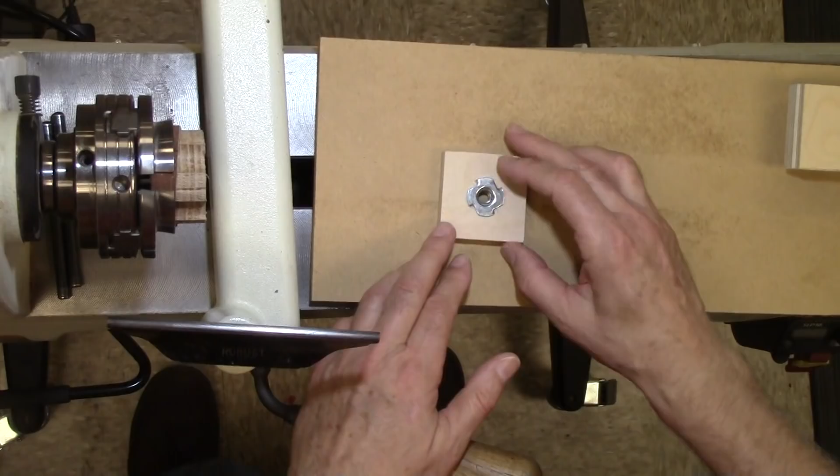And first thing I do is I take the body block and I'll drill a hole in the body block that gives me a snug fit of the shaft of the T-nut. So I want to have that hole that's that diameter, that'll just slip in there, not a tight fit. I want to be able to slip in, but I don't want it sloppy. If it's sloppy, if the wood around here is not supporting the body of that T-nut, any cocking movement like that is going to work this loose up here. With the cover block on, it's not so bad, but it's still going to get loose in there.

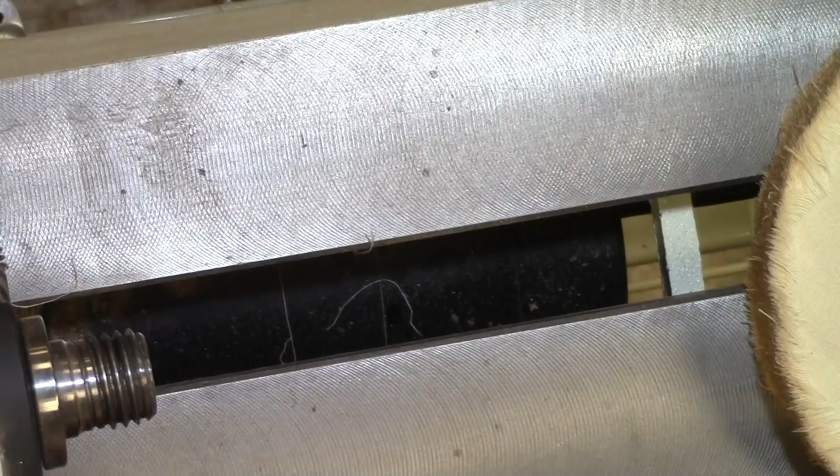So I want to drill this hole here as close as I can get to the diameter of the body of the T-nut. So to figure out what size I need, I've just drilled holes in a block that are close to what I'm thinking I'm going to be using. Then I can usually just take my T-nuts and see which hole it fits into.

And then once you get that hole drilled, let's see. Once you get that hole drilled, you stick your bolt through the hole and thread it into the T-nut. And then just put it in a vise, tighten it up, and just draw the T-nut down into the block of wood. I've seen some people hit it with a hammer and it doesn't actually go in straight.

Well, this way you've got the hole on the top here the same diameter as the bolt. So that helps force, well no, this one isn't. But it's the washer on here that is going to help pull that T-nut in straight and not get caught. So that's how I pull that in.

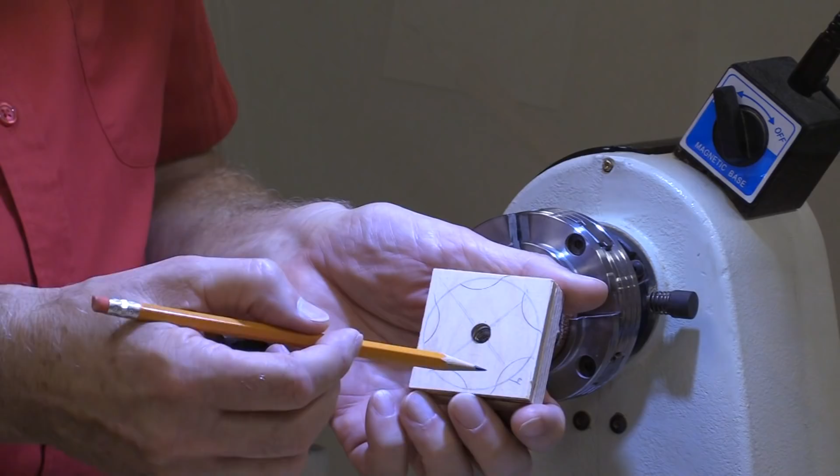So once I have it like that, now I can take it to the scroll saw, and what I do, I'm not an extremely proficient scroll saw user, so I tried cutting around and then going into the flutes and cutting around, going into the flutes, so I just wasn't very pleased with those intersections there. You see it better that way or see it better this way? The second way.

Okay. I was coming around here and then trying to cut in there and then come back out like that. I wasn't very pleased with the changes of direction there at my corners on my knob. So what I did is I just cut all the way around. It was easy to just follow the line without changing any directions. Then once I got around, then I could come in and just cut the flutes out on the scroll saw.

And you could leave it like that if you choose, but my diameter of my flute here is 1 inch. I got a spindle sander with a 1 inch spindle on it, and I'll show you using this a little bit later. After you do that, then I could take it to that spindle sander and just go around and clean up the flutes if I had a little bit of tear out from the scroll saw.

And then once I have that done, then I got my standoff block. Again, I got my hole in the center, mark it so when I go to scroll saw, I got something to follow. And then I bore the clearance hole in it. Then I take the scroll saw and I cut around that. Again, glue it on and use a bolt, put it in there and bolt, hold it, clamp it.

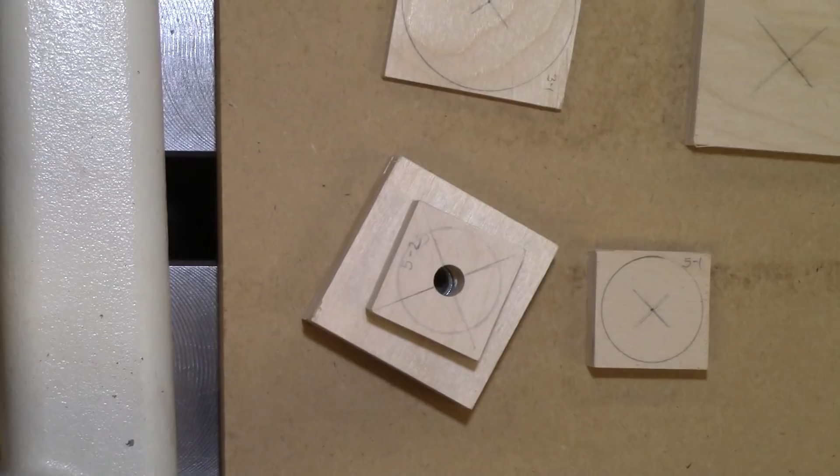And then for a scroll saw version, here's the finished scroll saw version. It's got an MDF and a Baltic birch. Okay, but I like to have things a little bit more contoured than that, so I'll show you the next steps of doing it on the lathe, finishing on.

So basically, I get to that same point, but instead of cutting the flutes, cutting the round on the scroll saw, I'll saw the square block like this, and I use a mandrel. Use a mandrel like that, and on the lathe. No, I'm sorry, I skipped a step there. I go ahead and glue the standoff block on. Everything is still square. I glue the standoff block on.

I'll screw it on this way first, and I'll clean up this surface here, make sure it's a reference surface there. And then once I get that rounded there, I can go ahead and take some of this material off here to get that down a little bit close to the final dimension. I could do the same thing up here, but I'd rather do it around this way.

Even with great pains, you try to get this whole board in this mandrel straight, and you swear everything is in there straight, and then when you turn it on, see, it doesn't run absolutely perfectly true. Now I could fiddle with that. I could drill that hole a little bit larger, and I could fiddle with it.

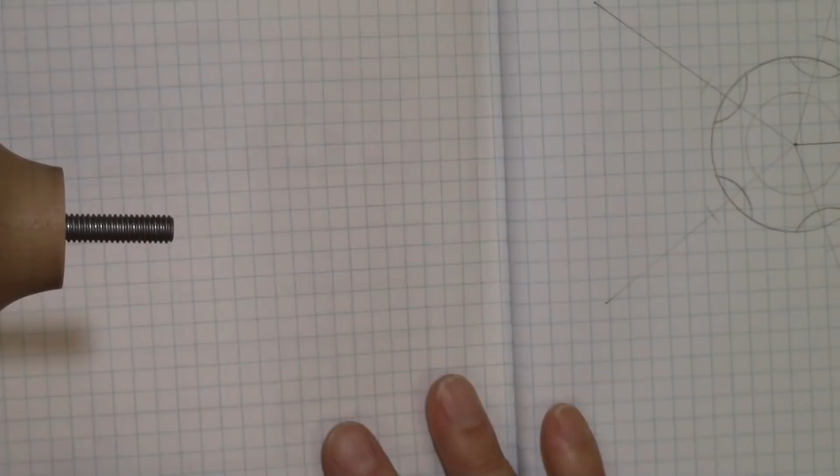I'm going to show you how you can draw your own pattern very easily. Larry wants to show off his pattern. I'll show Larry's pattern. Looks like Larry drew his. So it's very simple to draw that pattern. I can either describe this one, or I can actually draw it to show you.

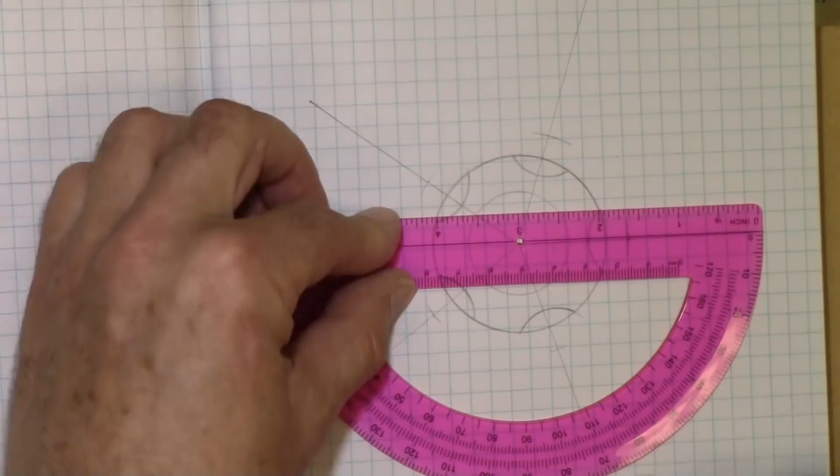I just selected a point, put my protractor on that point. Well, first I'll put a point and do a line out there. So I'll put a protractor on there. So I'm making a 5-sided figure here. 360 divided by 5 is 72. So I came up here and put a mark up here at 72, at 144. Flipped over this way, 72, 144, and then I drew my lines out to give me the points out there.

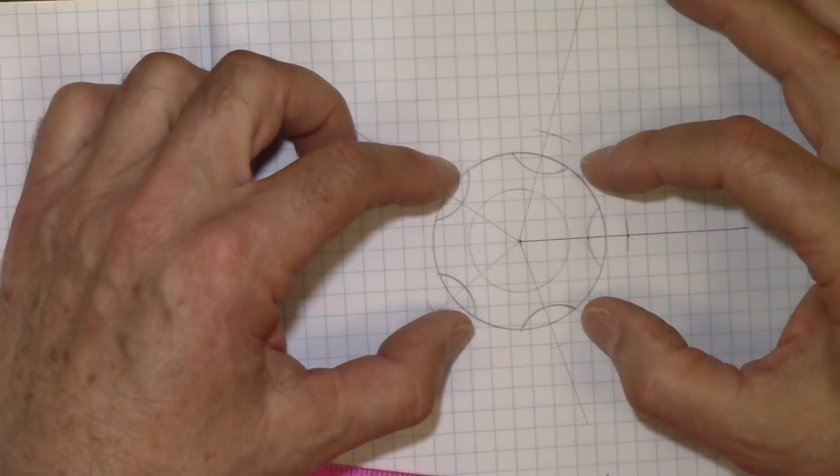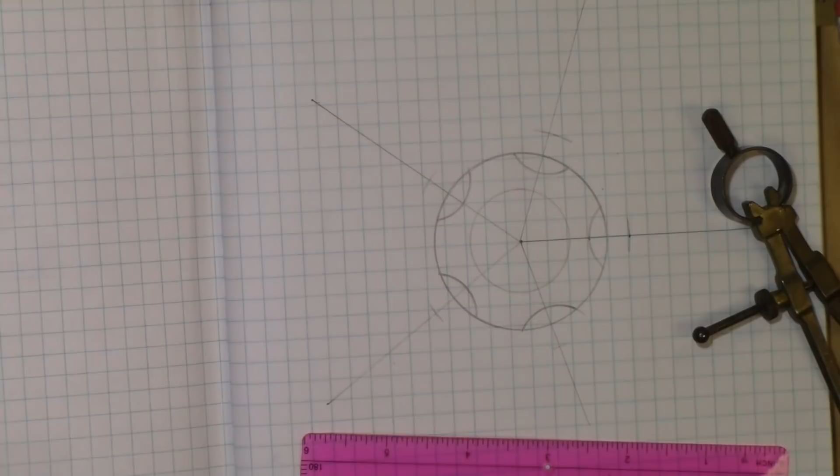Then I drew a circle for my 2 1/8 inch diameter circle. I drew a circle in here for my 1 1/16 standoff, and then I measured halfway between there and there, because I wanted my flutes to go in about half the distance from the outer diameter to there. That's the depth my flutes are going to be. So I measured in halfway, and then I wanted my flute diameter to be 1 inch.

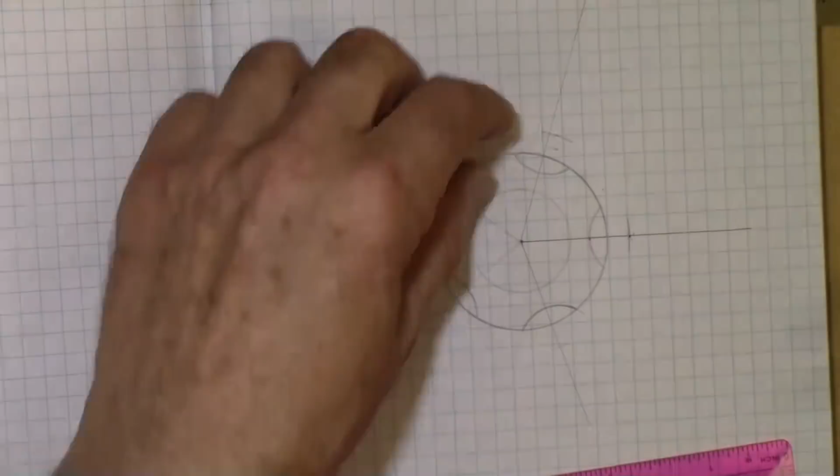So I came out here and made a mark at 1/2 inch. Then I reset my compass to that, from there out to there, and put marks on those lines at those points there. Then I set my compass back to 1/2 inch, and I just came in and drew the arc for each of the flutes like that, just going around it from that point there, and that's my pattern.

You cut that out and you glue it on. So if I want to make it a different size, well, you got to draw it over again. With DeltaCAD, I've got it on the computer. If I want another copy, just go print another copy out. You only have to draw it once.

So, I've got a question, Dan. Yeah. On the number of flutes on there, is there a big significance? Whatever you feel. Like I said, I like that knob. I patterned mine after that knob. Well, the biggest reason is you only have 5 fingers, some of us. Well, I'm only putting 4. You put one on each one of the flutes in there. Yeah, that works. You have 5 fingers, 5 flutes. There you go. But you can make them square or triangular or whatever.

No particular reason. I've got a knob at home that's probably got 8 flutes around, just real shallow flutes. All right. Just what your feel is. I like the feel of this knob, so that's why I did it with 5 flutes. And that's why the depth of that. I figured that was about the depth of what it was. I just liked the way that knob felt.

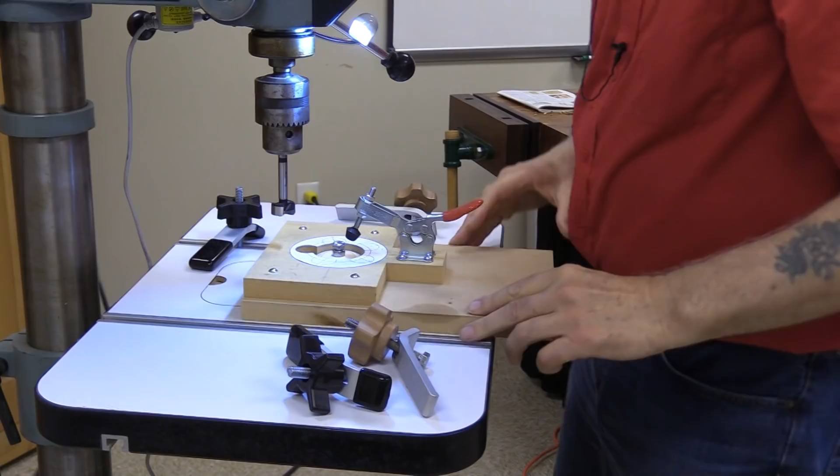Okay, jig. So that was the jig that I came up with to compete with Larry. So the first thing I do, I want to line my block up with that bit, so the bit goes up in and out of there without catching on the edges. So what you can do is release. Now you just bring this around like this.

And that'll hold it in place. And then... pieces back again to make sure it's going in without catching on the edges of that. And then tighten these down.

Those look like store-bought knobs. Well, I've got enough material there to make some more of these. I haven't got around to making them yet. I'm busy getting all my props done, and I haven't had a chance to complete them. So those will be replaced. You can have these, Rob. Okay, good.

I already got drawers going. And this is an afterthought. I was originally doing it with just 2 clamps, and it was moving on me a little bit. So I just got these last week, and I hadn't had a chance to make knobs for those yet. So that's going to hold it nice and secure.

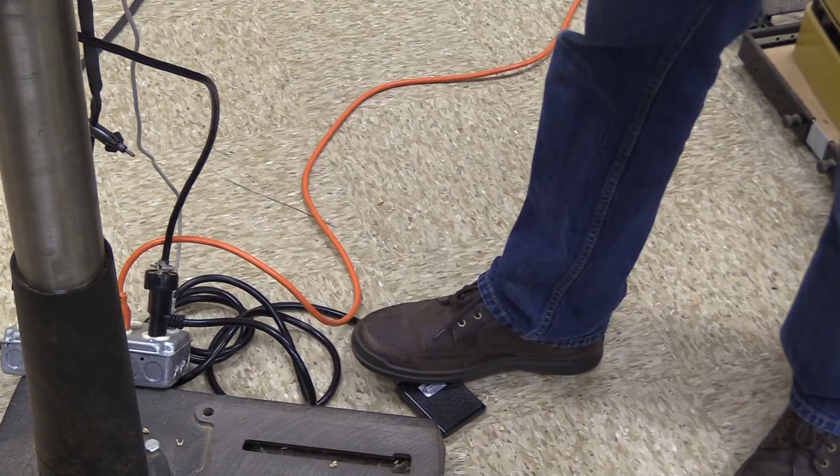I always use a dead man switch on the drill press, so I don't have to go up there. I got it in position. I don't have to look for the power switch. So if something goes wrong, all I got to do is pick my foot up and it stops.

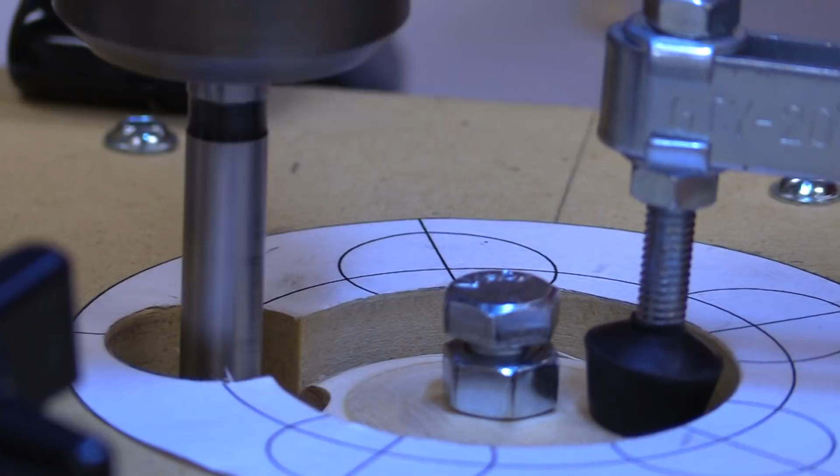So now, instead of lining up here, all I'll do is just come back in and line it up again with the bit, with that flute. And I go around 4 more times, 3 more times.

And you see I got a bit of tear out in there. Since the bit is coming here and it's going against the grain, it's tearing the grain out. So to fix that, what I did is I'll just come in there. Now this is slightly larger than 1 inch. So I come in, I just go down till I get to the bottom of the flute, and then just round the corners off a little bit.

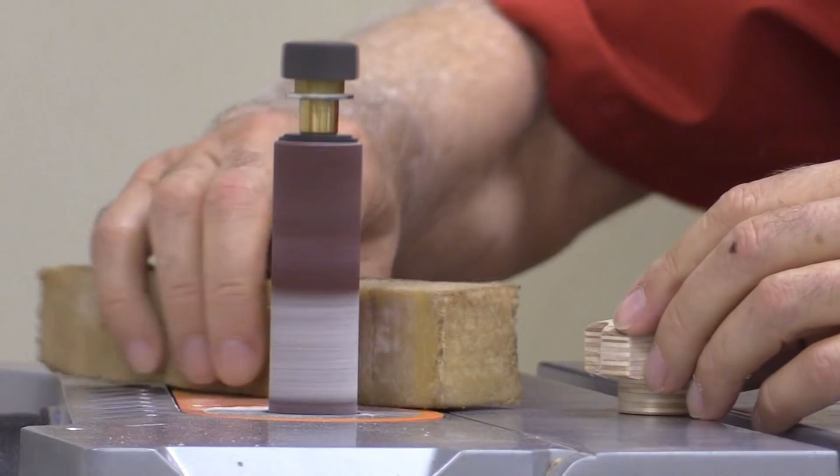Little crepe stick here to clean that off periodically. Now to get rid of this sharp edge on here, I'll just hold it like that and just get rid of that little sharp edge on the top. And it's kind of hard, since my standoff is there, I can't really get in to do the bottom very well. So I'll do a little bit that I can.

Then I just come back with some hand sandpaper. I'm just using hand sanding and clean it up. I think that's about it for the T-nuts. Oh, well, one other thing. Yeah, I'll show you that now.

You can leave it like that, or... before I put the pattern on, I didn't tell you, but I had sanded that block down to 400 on the lathe. And then, of course, the flutes are sanded. This is a 120 grit, so that's as fine as I can get the flutes sanded. But after I get it sanded up, I want to give it a little more pizzazz. Yes.